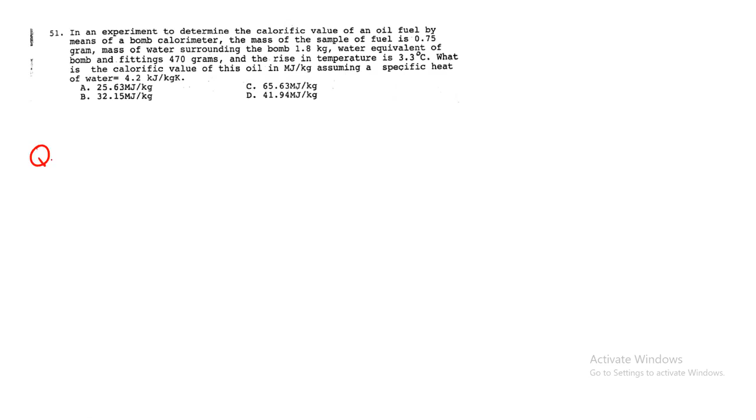So hinahanap, kung mapapansin nyo sa choices, megajoule per kilogram yung ating unit. So syempre, para makuha natin ang calorific value, so calorific value, or heating value, calorific value is also called heating value, is equals to Q over mass ng fuel.

So ilan ba yung Q natin? Si Q makukuha natin using MC delta T. So MC delta T, then divide natin yung mass ng fuel. Si mass dito guys, so si mass ng water surrounding the bomb 1.8 plus yung water equivalent of bomb and fitting. So ito is Q ng water to guys.

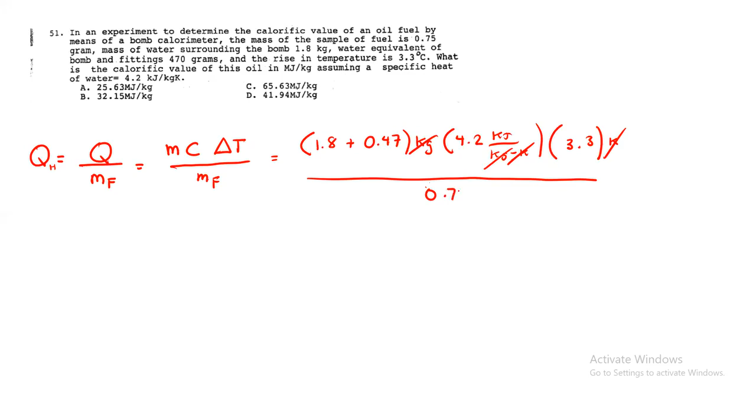So ilan yung mass natin? 1.8 kilograms plus 0.47 - itong 470 grams, 0.47 para maging kilogram. Then ang C natin is 4.2 kilojoule per kilogram to Kelvin. Then ang change in temperature, so 3.3 Kelvin. So cancel, kilogram divided by mass ng fuel na 0.75 grams. So 0.75, divide natin ng 1,000 para maging kilogram din. So yan, makuha natin yung sagot dito.

So 1.8 plus 0.47, ang makukuha natin dito guys is ilan ba? So 1.8 plus 0.47 times 4.2 times 3.3 divided by 0.75 over 1,000. So medyo malaki to: 41,949.6.

So megajoule or kilojoule per kilogram pa lang yan. So ito times natin ng 1 megajoule per 1,000 kilojoules. So syempre ang sagot is 41.9496 megajoule per kilogram. So therefore the answer is letter D.

So ganyan lang siya, no? Minsan guys, ang pagbabasehan mo lang is yung unit ng sagot. So alam natin pag calorific value, it pertains dun sa fuel natin. So ang unit ng ano is either kilojoules per kilogram or megajoules per kilogram. So per unit mass palagi ang calorific value. So yung heat, pwede mo makuha yan sa given, it's either MC delta T or may given na heat yan.

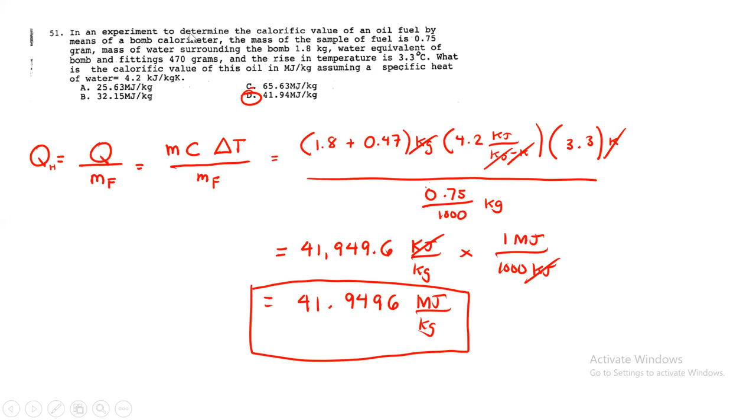So next, 53. So ito, pressure cooker problem. A pressure cooker operates by cooking food at a higher pressure and temperature than is possible at atmospheric conditions. Steam is contained in the sealed pot with vent hole in the middle of the cover, allowing steam to escape. The pressure is regulated by covering the vent hole with a small weight, which is displaced slightly by escaping steam. Atmospheric pressure is 100 kilopascal. The vent hole is 7 mm squared, and the pressure inside should be 250 kilopascal. What is the mass of the weight?

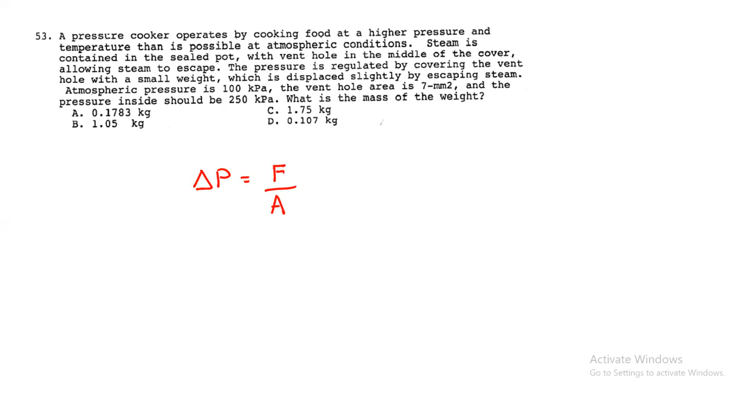So hanapin natin yung force. Yung force, pwede natin gamitin - so weight yan. Weight equals to mass times gravity. So ganun lang, change in pressure is equals to mass times gravity over area.

So ilan yung change in pressure natin? So 250, pag minus mo lang, lagi mo lang yung mas malaki muna minus yung sa mas maliit na pressure. So 250 minus 100 kilopascal. So kilopascal or kilonewton per meter squared is equals to mass times gravity na 9.81 meter per second squared divided by area na, so ilan yung area natin? 7 mm squared.

So 7 mm squared, 7 mm, divide mo ng 1,000 para maging meter. So squared, para maging meter. Kaya dinabay natin ng 1,000 yan para maging - or ano pala siya, no? 7 mm squared siya mismo.

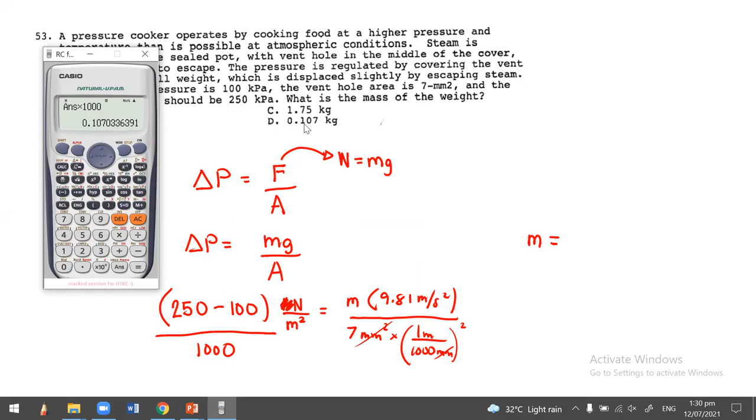So the answer is letter D. Very easy.

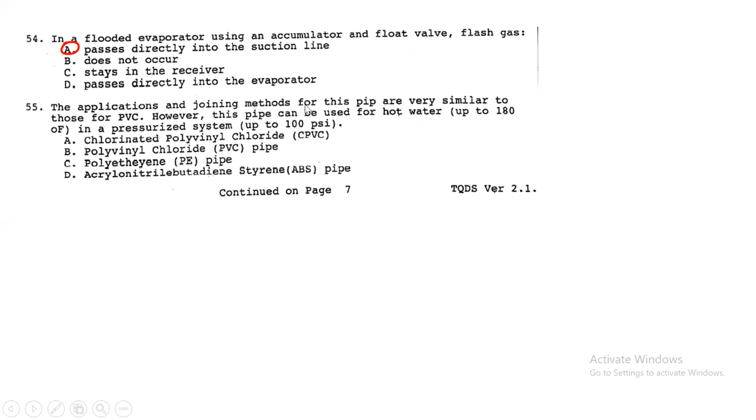Then 55: The application and joining methods for this pipe are very similar to those for PVC. However, this pipe can be used for hot water up to 180 degrees Fahrenheit in a pressurized system up to 100 PSI. So the answer to 55 is chlorinated polyvinyl chloride. That's also in the blue book.

Next, 56: In a hydraulic turbine which has a diameter of 60 inches, speed of 350 RPM, coefficient of velocity of 0.98, peripheral speed factor of 0.45, generator efficiency of 90%, and jet diameter from nozzle of 6 inches, determine the power input in HP.

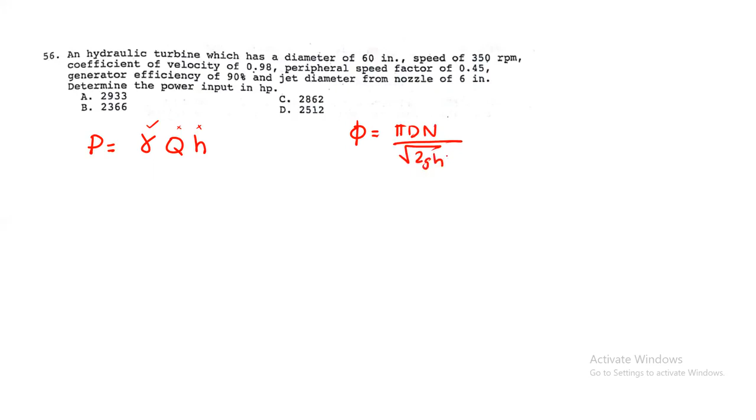Peripheral coefficient is equal to pi dn over square root of 2gh. So we can get it using this formula. Peripheral coefficient or peripheral speed factor 0.45 is equal to pi times diameter. So how much is our diameter here? 60 inches, divide by 12 to make it feet.

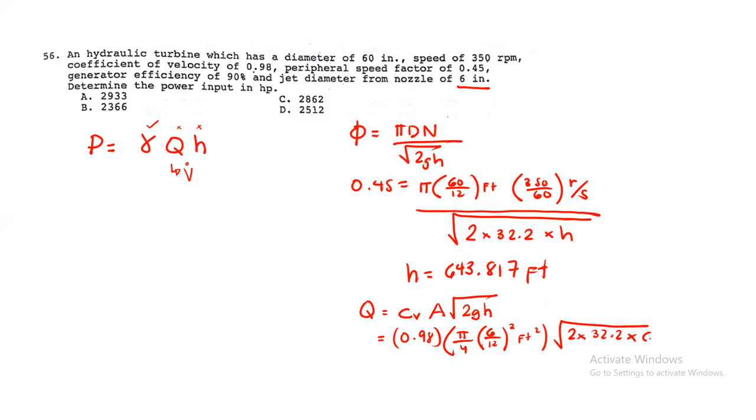Or actually, it's not 60 we'll use there, but the diameter of the nozzle or jet diameter from nozzle: 6 over 12 squared, feet squared, times square root of 2 times 32.2 times the height 643.817 feet. So that gives us feet per second.

Square root of 2 times 32.2 times 643, times pi over 4 times 6 over 12, squared—this is the one that's squared—times 0.98. So 39.18 cubic feet per second.

Let's substitute here. Specific weight is 62.4 pounds per cubic foot, then the volume flow rate is 39.18 cubic foot per second, times head of 643.817 feet. So that cancels, pounds to foot per second. Let's convert, divide by 550 pounds to foot per second per HP. So all this cancels out.

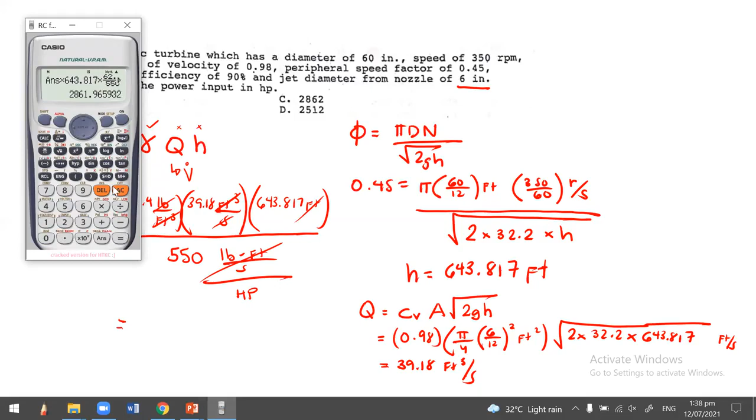So only HP is left here. So what's the answer? Times 643.817 times 62.4 divide by 550. So 2862 HP. That's how it's done, guys. The answer is letter C.

The next, problem number 57. Pure water enters a 3 centimeter diameter copper tube with a given velocity, 50, temperature 20 degrees Celsius, and is heated. What is the average convective coefficient?

So H is what we're looking for here. For water, kinematic viscosity is given as 1.006 times 10 raised to negative 6, Prandtl number is 7, and thermal conductivity of 0.597 watts per meter to Kelvin.

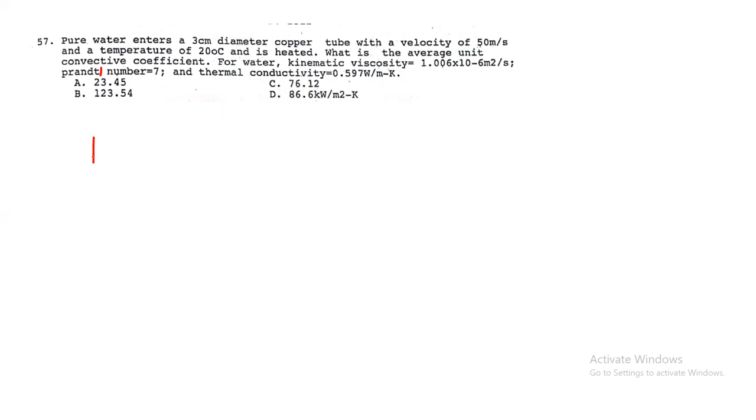So how do we solve this, guys? Our formula here is H equals NU times K divided by diameter. NU is the Nusselt number. For pure water, the Nusselt number is 4.36 constant.

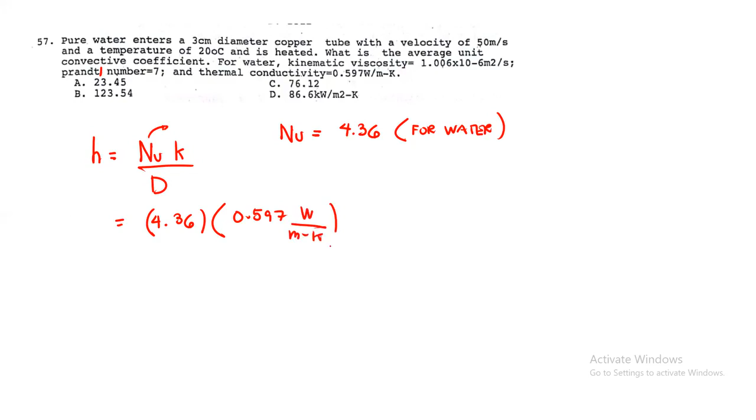K is 0.597 watt per meter to Kelvin. Our diameter is 3 centimeters, so we divide by 100 to convert to meters. The meter doesn't cancel, it becomes meter squared. So our answer here, guys, is 86.76 watt per meter squared to Kelvin. The answer is letter D.

Not all the given values here will be used. You just pick the ones usable in the actual formula. So for this problem, memorize that the convective heat transfer coefficient H equals Nusselt number times thermal conductivity divided by diameter. The Nusselt number of pure water at 20 degrees Celsius is 4.36, constant and unitless.

Next, problem 58. The journals of a stainless steel shaft are 38 centimeter diameter. It runs at 105 RPM and the coefficient of friction between journals and bearings is 0.02. If the average load on the bearings is 200 kN, find the heat generated per minute at the bearings. This is actually a machine design problem, but it appears here in PPE topics. Sometimes questions migrate from math to PPE or machine design to PPE or vice versa, so we need mastery of all subjects.

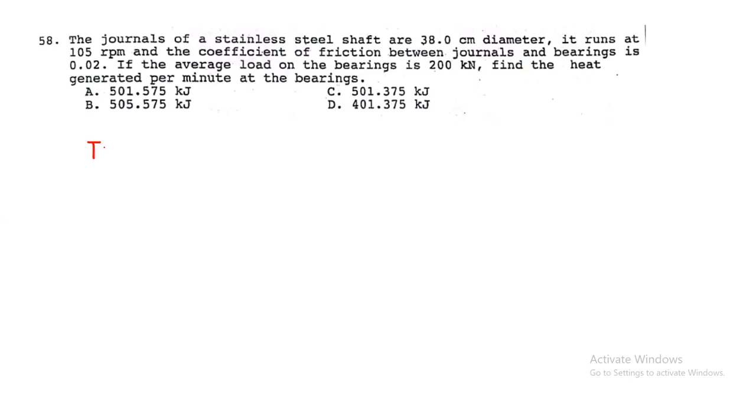First, our torque equals force times radius times coefficient of friction - this is the frictional torque. If there's no given friction, it's just force times radius. Our force is 200 kilonewton or 200,000 newton times radius.

Let's convert 38 centimeters into mm, giving 380 mm. Divide by 2 to get the radius, times friction 0.02. That's our frictional torque. Calculate: 200,000 times 380 divided by 2 multiplied by 0.02 equals 760,000 Newton-mm.

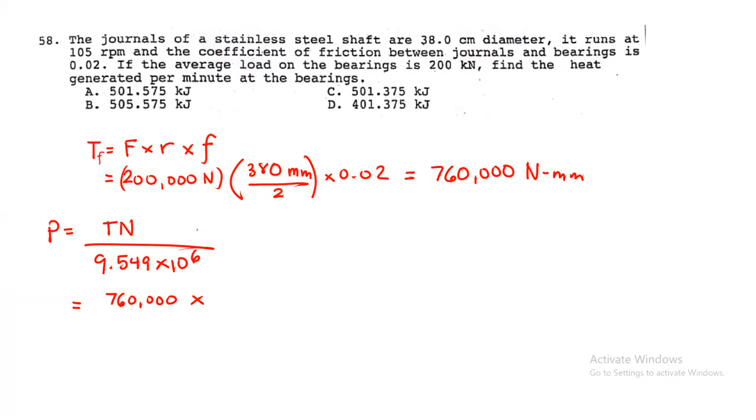Now let's get the power. Power equals Torque times N over the factor 9.549 times 10 raised to 6, which gives us power in kilowatts. Torque is 760,000, times RPM which is 105, divided by 9.549 times 10 raised to 6. So what is our power?

Times 105 divided by 9.549 times 10 raised to 6, giving us 8.357. This unit is kilowatts or kilojoule per second, so we multiply by 60 seconds per minute to cancel units properly.

So the answer is 501.41 kilojoules per minute. That's our answer. What's the closest choice? 501 point... this is closest, 575, so 501.575.

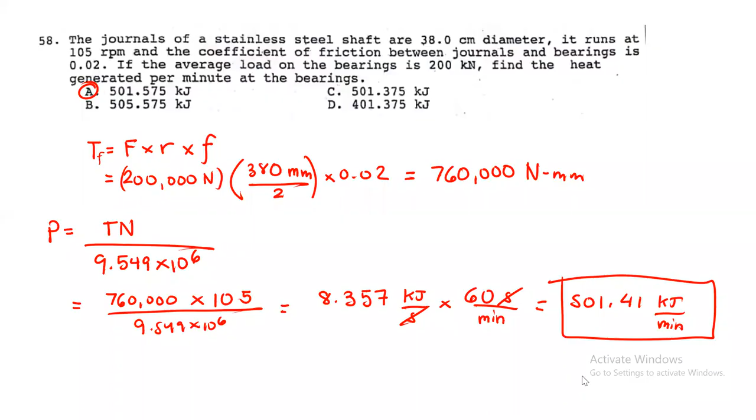Next, problem number 59. An insulated steam pipe located where the ambient temperature is 32 has an inside diameter of 5 cm with 1 cm thick wall. The outside diameter of the corrugated asbestos insulation is 12.5 cm and the surface coefficient of still air is 12. Inside the pipe is steam having a temperature of 170 with film coefficient H inside equal to 6,000. Thermal conductivity of pipe and asbestos given as 45 and 0.12.

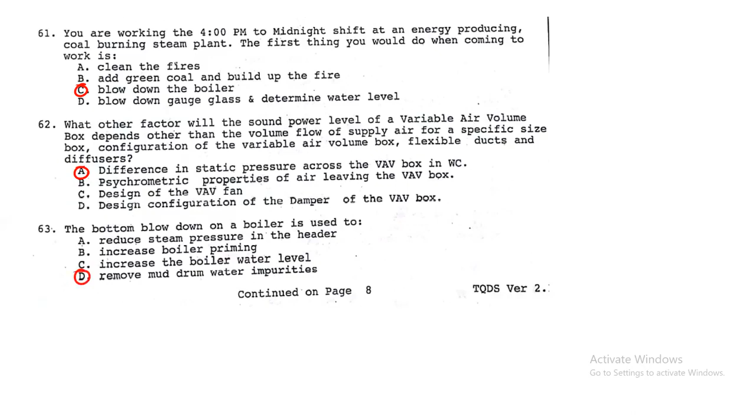So, ang sagot dito is blow down the boiler, letter C. Naulit lang yan. Then 62, naulit rin. So, ang sagot diyan is letter A. Then 63, the bottom blow down on a boiler is used to, ang sagot dito, letter D. Remove mud drum water impurities. So, next.

So, 64, the moisture content of the steam at exit will be blank by also increasing the boiler pressure in Rankine cycle. So, ito is galing sa Blue Book problems rin, no? So, the answer here is letter A. It will increase the boiler pressure.

So, next, 65. Pure steam at a pressure of 30 bar and a temperature of 375 degrees Celsius is generated in a boiler at a rate of 30,000 kilograms per hour from feed water at a temperature of 130 degrees Celsius. Yung fuel natin has a calorific value of 42 megajoules per kilogram and the daily consumption is 53 tonne. What will be the equivalent engine power if the overall efficiency of the plant is 0.13? So, itong 53 tonne na to, ito is metric ton. Pag may nabasa kayong ganyang spelling ng ton, metric ton yan.

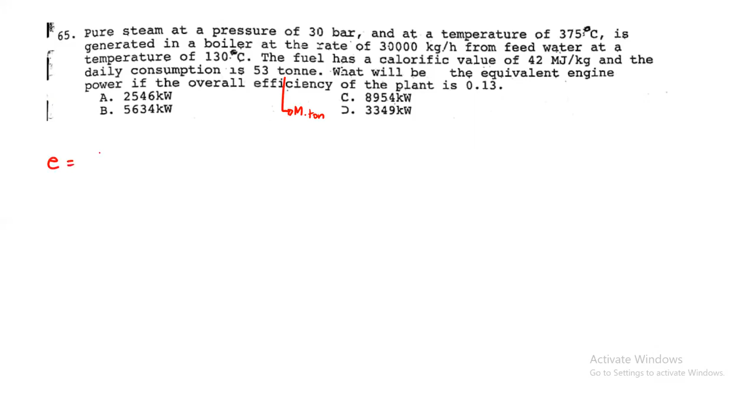So, para makuha natin yung equivalent engine power, makuha natin yan using efficiency is equals to equivalent engine power over yung heat ng fuel, so mf QH. Alam natin ang efficiency is power output over power input. Yung power input, laging yan yung power ng fuel. So, ilan yung efficiency? 0.13 is equals to PE divided by mass ng fuel, 53 metric tons. Daily consumption, ibig sabihin per day yan. So, 53 metric tons per day.

Then yung heating value ng fuel or yung tatawagin natin calorific value, 42 megajoules per kilogram. So i-convert lang natin to. Times 1 day per 24 hours times 1 hour per 3,600 seconds. Then 1,000 kilograms per metric ton. So, ano na matitira dito? Makakancel si kilogram. Megajoule per second. So, i-convert pa natin yan, 1,000 kilojoules per megajoule. So, makukuha natin si engine power, or yung power output.

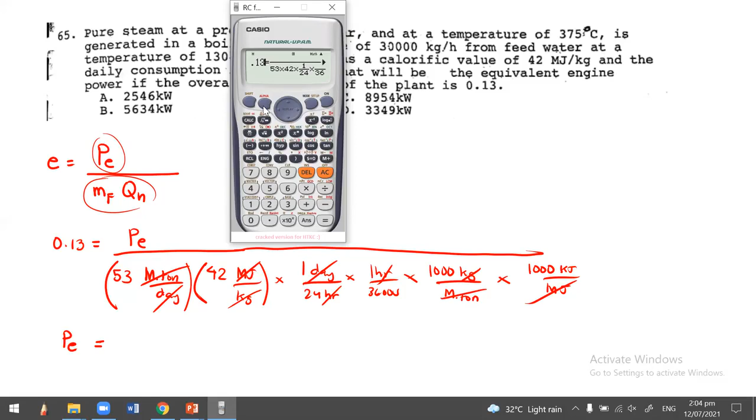So, 0.13. So, ilan to? Shift solve pala natin. So, 3349 kilowatts. So, tandaan nyo sa problem na to, power output over power input.

So, next, 66. Si Neil Armstrong, an astronaut, is subjected to an acceleration equal to 5 times the pull of the Earth's standard gravity during the takeoff in a spaceship. The said astronaut is 180 pounds and the takeoff is vertical. Determine the force he exerts on the seat.

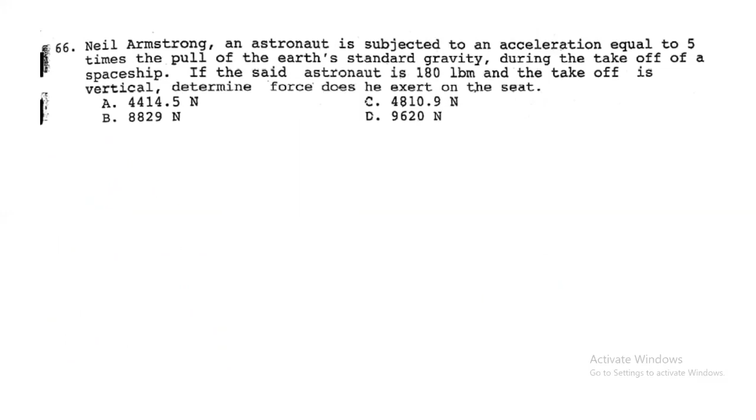So, paano to? Ganun lang din yan, no? Summation ng force vertical is equals to 0. Yung motion niya kasi is pataas, so yan yung force niya. Then, meron siyang weight, syempre. Then, yung reverse effective force, laging ina-apply yan opposite dun sa direction ng motion niya. So, pababa rin yung reverse effective force. So, summation ng force vertical: F is equals to weight plus reverse effective force. Ang weight natin is mass times gravity plus reverse effective force is mass times acceleration.

So, naulit pala itong problem na to, no? So, mass times acceleration plus gravity. Ang acceleration natin is 5 times gravity, sabi niya sa problem. So, m times 5g plus g. So, mass is 180 pounds times 5 times 32.2, or Newton pala kasi dapat yung lalabas. So, i-divide natin ito ng 2.2 para maging kilogram, guys. So, 5 times 9.81 plus 9.81 meter per second squared. Ang lalabas dito is in Newton. So, ang sagot, 4810.9 Newton. The answer is letter C.

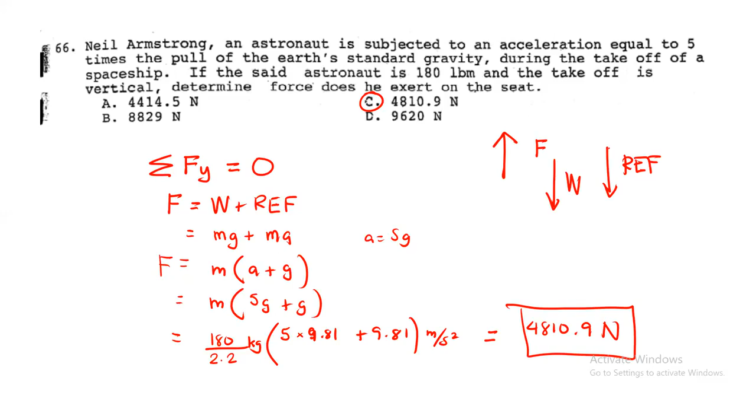So, next, 67. The term spalling refers to a boiler, combustion chamber yan. Next, 68. A newly installed turbine receives 150 pounds mass per second of air at a pressure of 63 psia and a temperature of 2450 degrees Rankine and expands it polytropically to a pressure of 14.7 psia. The exponent n is equal to 1.45 for the process. Determine the power. So paano tong number 68?

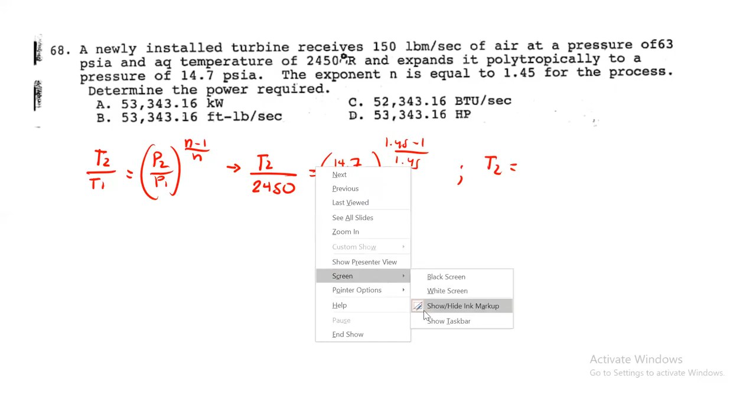Sa 68, easy lang tong solution dito, no? Para makuha natin si power, polytropic process kasi to. So kunin muna natin guys dito si T2. T2 over T1 is equals to P2 over P1 raised to n minus 1 over n. So ang T1 natin, 2450 degrees Rankine, P2 is 14.7, P1 natin is 63 psia. Ang n natin is 1.45. So, makukuha natin T2: raised to 0.45 over 1.45 multiplied by 2450. So, ilang sagot dito?

.45. Bakit? Taas ko pala na yan. So, 1559.62. So, 1559.62 degree Rankine. So, syempre, para makuha natin yung power required, is equal to power or yung work. Syempre, ang polytropic work is M, or mass flow rate times R times T2 minus T1. So, pwedeng ganitong formula ang gamitin natin, no? Divided by 1 minus n.

So, ilan yung mass flow rate natin? 150 pounds per second times R natin is 53.34 pounds force-foot per pound mass-degree Rankine. Then times T2. So, ang T2 natin is 1559.62 minus 2450 degree Rankine, divided by 1 minus 1.45. So, makancel dito degree Rankine, pounds of mass. So, matitira dito is foot-pounds per second. So, i-convert pa natin into,

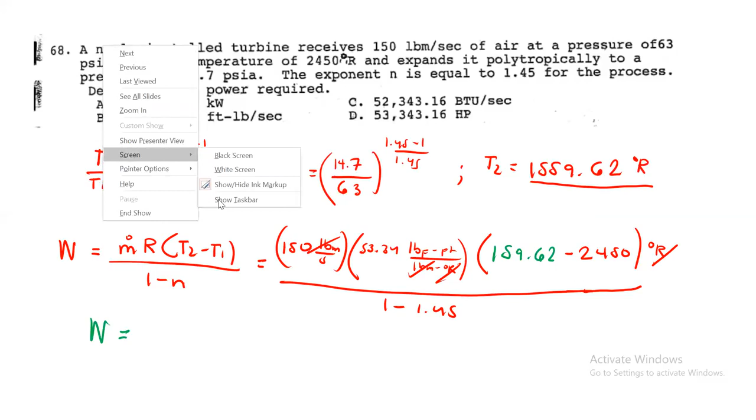So, work is equals to, so try natin, times 159.62 minus 2450 divided by 1 minus 1.45. So, ang makuha natin dito is 40,722,956 foot-pounds per second.

Then convert natin, 1 BTU per 778 foot-pounds. So, makancel. Divide natin 778. So, 52,343.13 BTU per second. So, sakto lang din nakuha.

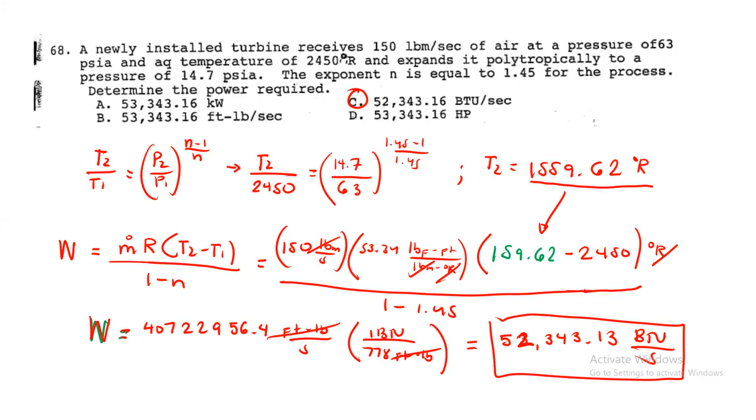69. What is the pressure at 12,300 feet altitude if air is incompressible, if the atmospheric air is 14.7 psia and 60 degree Fahrenheit at sea level? Note at 60 degree Fahrenheit the density of air is 0.0763 and P1 is 14.7. So sabi niya the air is incompressible. So P2 is equals to P1 e raised to negative gh over RT. So, yan yung gagamitin nating formula.

So, P1 natin is 14.7 psia times e raised to negative g. So, dito, kapag English unit, tatanggalin mo na yung g. So, sulat mo na dyan 12,300 feet divided by 53.34 times temperature na 60 plus 460. So tatandaan niyo pag English, tatanggalin niyo na yung g dyan.

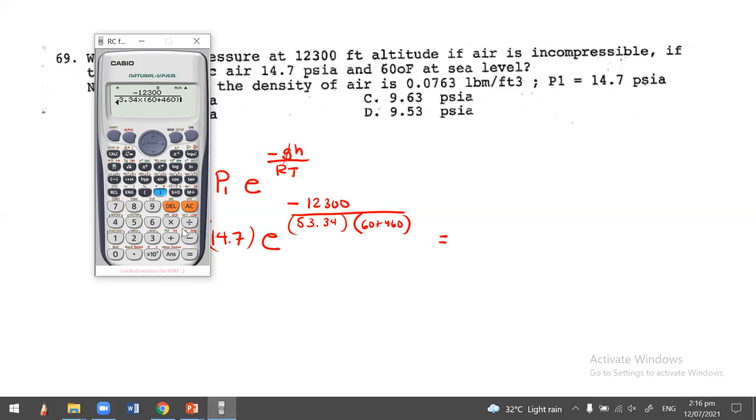So ilan yung lalabas? 14.7 e raised to negative 12,300 over 53.34 times 60 plus 460. So 9.43 psia. So the answer is letter B.

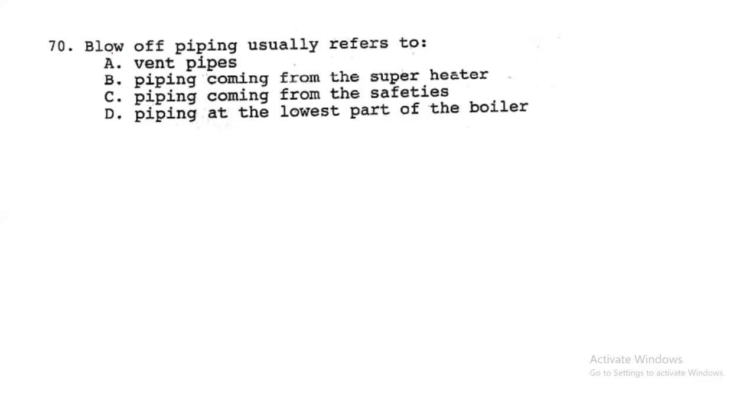So next, tuloy-tuloy lang tayo. Problem number 70. Blow-off piping usually refers to, so ang sagot dito, piping at the lowest part of the boiler, letter D. So next, 71. Medyo mahaba to. Heat transfer na naman. Hinahanap dito, what thickness of insulating bricks is necessary between refractory and steel?

So ang gagamitin natin formula, Q is equals to change in temperature over x1 over k1 plus x2 over k2 plus x3 over k3. So ang Q natin dito is 788 watts per meter squared. Then change in temperature natin, 1,200 minus 40, divided by x1. Yung thickness number 1 is 15.2 cm, or 0.152 meter.

Divide natin ng 1.384 na k1, plus x2. Yan yung hinahanap natin, yung thickness between refractory and steel, divided by k2, yung insulating brick, 0.15, plus x3. Meron pang 1 cm na steel, so 0.01 meter divided by k3. Ang k ng steel is 45. So makuha natin x2 in meter.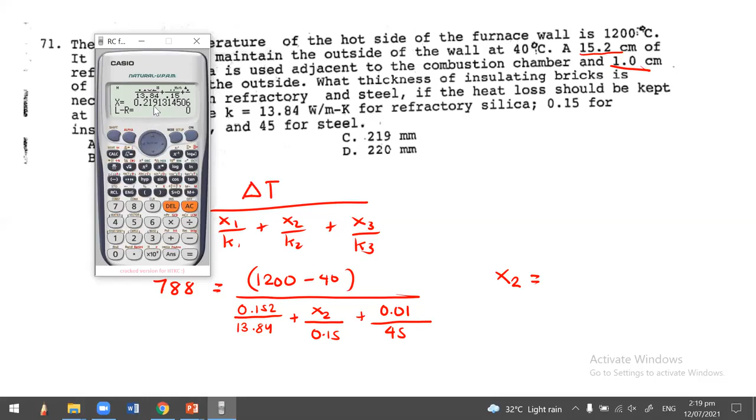(1200 minus 40) divided by 0.152 over 13.84 plus alpha x 0.01 over 45. So shift solve. So 0.219. So 0.219 meter or 219 mm. So the answer is letter C.

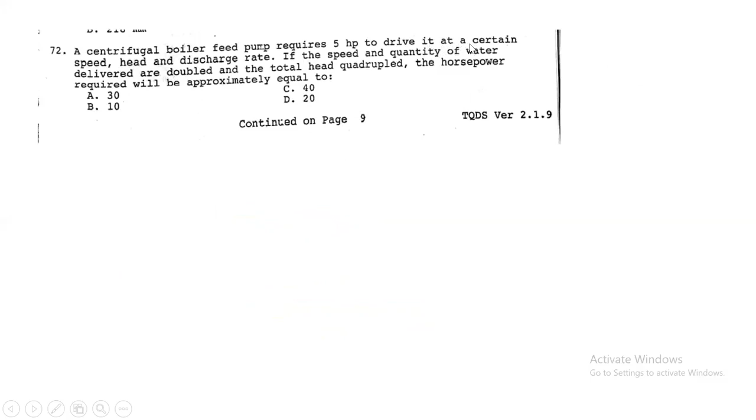So next, 72. A centrifugal boiler feed pump requires 5 HP to drive it at a certain speed, head, and discharge rate. If the speed and quantity of water delivered are doubled and the total head quadrupled, the horsepower required will be approximately equal to.

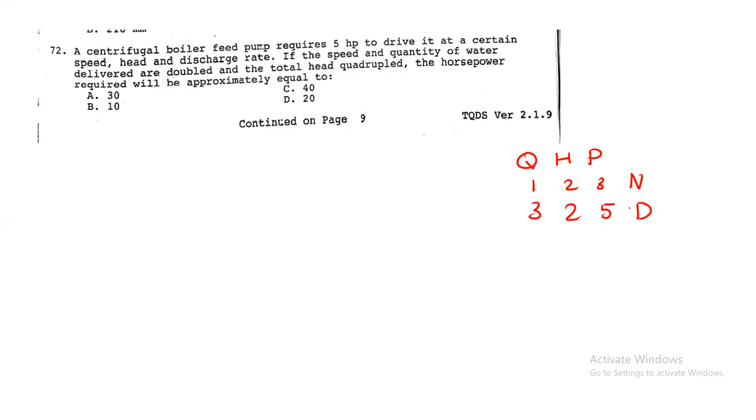So P2 divided by P1 is equal to N2 over N1, raised to 3, then D2 over D1 raised to 5.

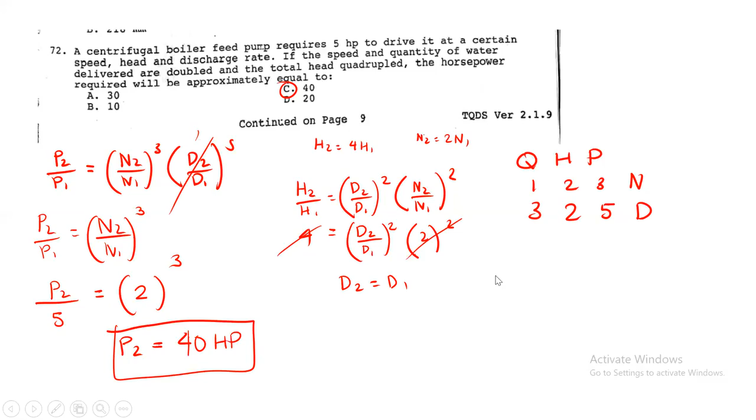So next, 73. As a safety precaution, refrigerant cylinders should be stored and transported in the blank position to keep the pressure relief valve in contact with the vapor space, not the liquid inside the cylinder. So the answer to 73 is upright, always upright. Then 74, during hydrostatic test, the safety valve should be, of course, removed.

The next, 75. So itong college student. So hinahanap dito guys, determine the temperature in the room when she comes back 10 hours later.

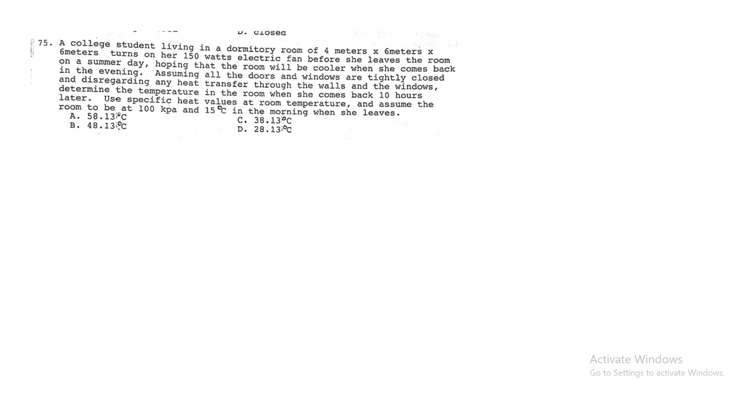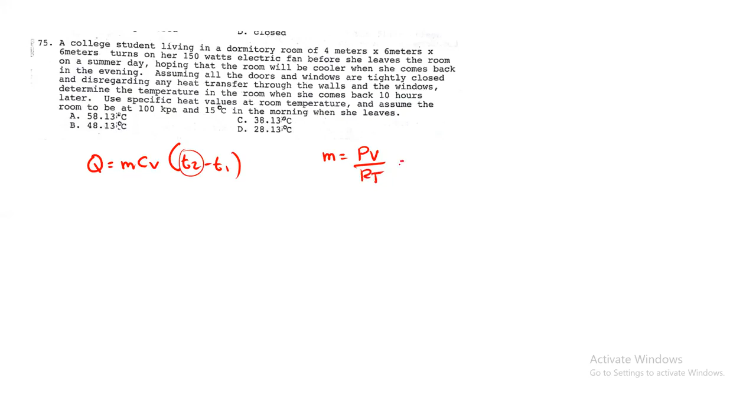So makuha natin using Q is equal to mCv delta T, so T2 minus T1. Hinahanap natin dito si T2. So kunin muna natin si mass guys, using PV over RT. The pressure given is 100 kilopascal. Then the volume is 4 times 6 times 6, the dimension of the room, divided by R, 0.287, times temperature, 15 plus 273. So makuha natin dyan is 174.216 kilograms.

Substitute natin dito. So may given tayong Q or yung power. The power is 150 watts. So Q can be obtained using power times time. So 150 watts or 0.15 kilojoules per second or kilowatts times time. So 10 hours, times 3,600 seconds per hour, then times 10 hours. Ma-cancel, para maging kilojoules na lang yung Q natin. Then is equal to mass.

174.216 kilogram times Cv. So, ano yung Cv ng air? The Cv of air is 0.7186. Since sinabi niya rin na assuming all doors and windows are tightly closed, ibig sabihin insulated yung room natin, constant volume. 0.7186 kilojoule per kilogram Kelvin.

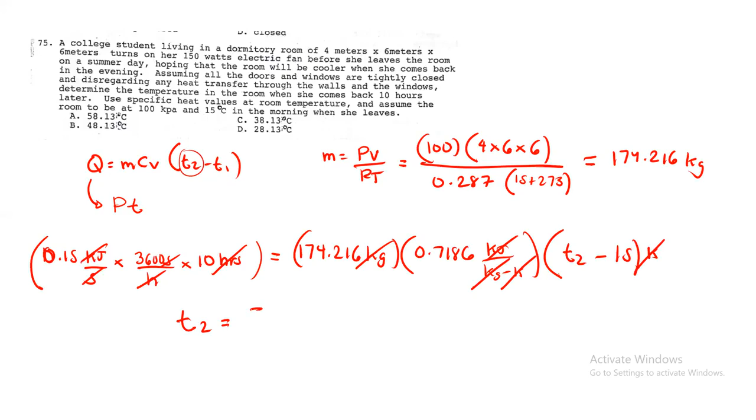Then, times T2 minus T1, 15 degrees Celsius. Pwede natin Kelvin na lang yan dahil change in temperature. So, maka-cancel Kelvin, kilogram, kilojoules. So, T2 is 58.13 degrees Celsius. So, the answer is letter A.

So, next, problem number 76. The enthalpy of a groundwater in a 20 megawatt geothermal power plant is 1,000 kilojoules per kilogram. If the quality after throttling is given as 28% and the overall plant efficiency is 20%, what is the mass flow rate of the steam entering the turbine?

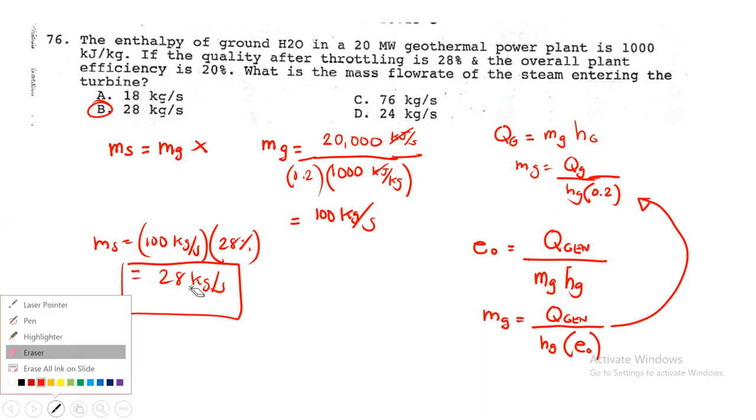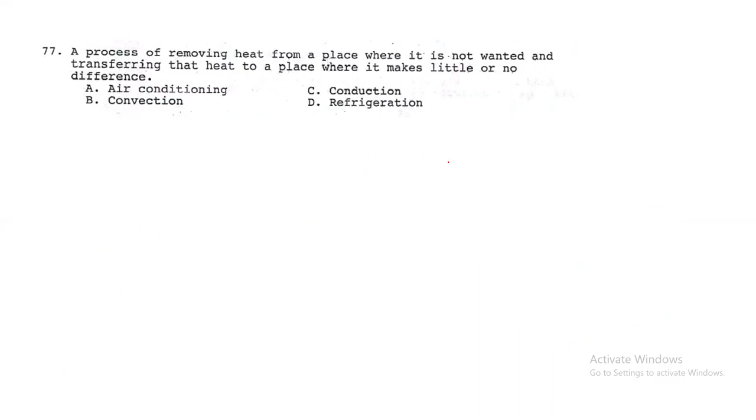So next, problem number 77. A process of removing heat from a place where it is not wanted and transferring that heat to a place where it makes little or no difference. So ang sagot dyan is letter D, refrigeration. So next, 78.

The mass analysis of a fuel is 84% carbon, 14% hydrogen, 2% ash. It is burned with 20% excess air relative to stoichiometric requirement. If 100 kilograms per hour of this fuel is burned in a boiler, what is the volumetric flow rate of the gas if its temperature and pressure are 250 degrees Celsius and 1 bar respectively? Note, air contains 23.1% oxygen by mass. The universal gas constant is 8.3143. And atomic mass relationships are oxygen 16, carbon 12, and hydrogen 1.

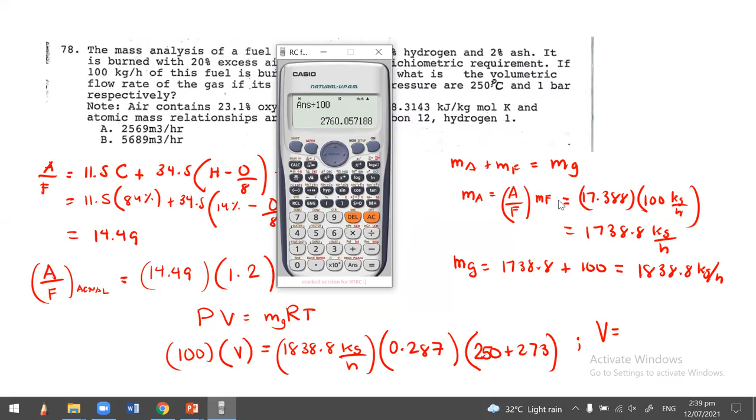1838.8 times 0.287 times 250 plus 273, divided by 100. So the answer is 2760 meter cube per hour. So the answer is letter C. Ganun lang siya guys.

Next, problem 79. The mass flow rate of Freon 12 through a heat exchanger is 10 pounds per minute. Enthalpy of Freon entry is 102 and of Freon exit is 26. Water coolant is allowed to rise 10 degree Fahrenheit. So the water flow rate in liters per minute is what we need to find. We're looking for the volume flow rate in liters per minute of the cooling water.

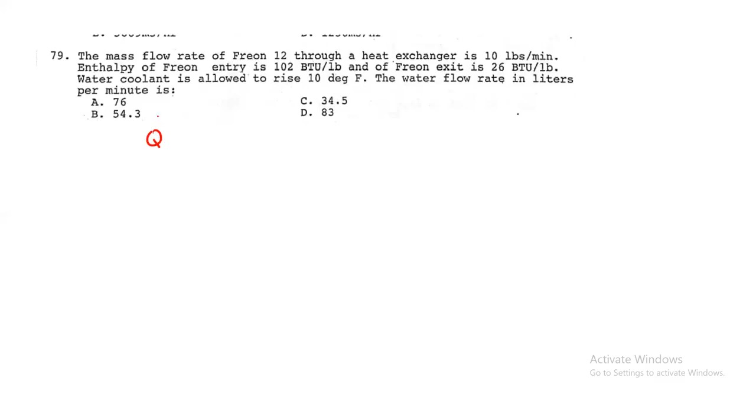So in a heat exchanger, the Q of the Freon is equals to Q of the water. What is Q of Freon? Mass of Freon times H1 minus H2 is equals to mass of cooling water times Cp times delta T. So how much is the mass of Freon? 10 pounds per minute. Then H1 minus H2 is 102 minus 26, in BTU per pound, equals mass of cooling water. So how much is the mass of cooling water here? That's what we're looking for. The mass of cooling water, we can get using density times volume flow rate.

So let's substitute, density times volume flow rate. How much is our density? Density is 62.4 pounds per cubic foot, times volume flow rate, times Cp of water which is 1 BTU per pound per degree Fahrenheit or Rankine, times change in temperature given as 10 degree Fahrenheit. So the pounds will cancel, then BTU will cancel, and what remains is cubic foot per minute.

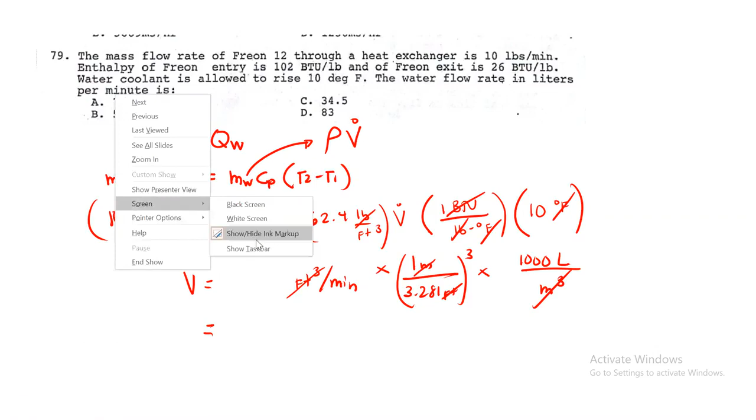Let's calculate: 10 times 102 minus 26 is equal to 62.4 times alpha x times 10. Shift solve. So 1.2179, times 1 over 3.281 raised to 3, times 1,000. So the answer is 34.48 liters per minute. The answer is letter C.

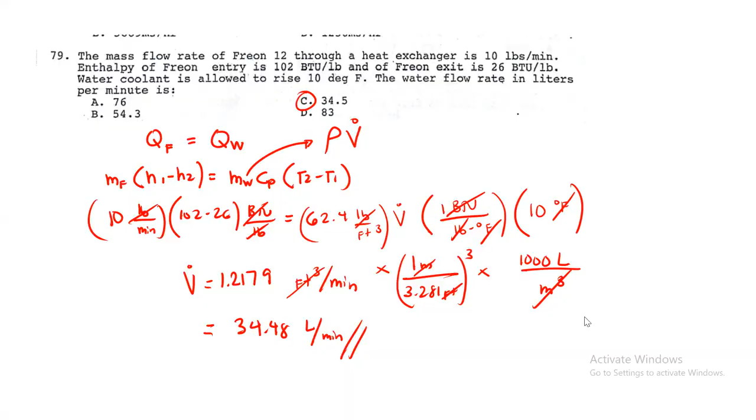Next problem, problem number 80. Hot gases at a temperature of 280 flow on one side of a metal plate 1 cm thick, and air at 35 flows on the other side. The heat transfer coefficient of the gases is 31.5 and that of the air is 48. Calculate the overall heat transfer coefficient. We're looking for U here.

So U is equals to 1 over RT. What is RT? That's the reciprocal of the overall heat transfer coefficient. We can get RT using 1 over H1 plus X over K plus 1 over H2. We don't have a given K for the metal plate, so for the metal plate we use K is equals to 50.

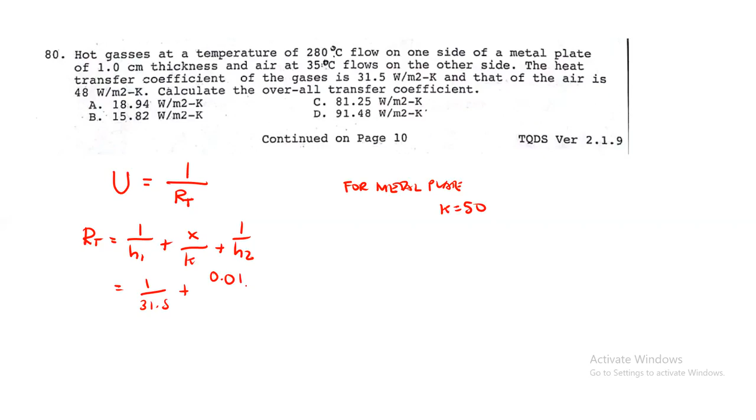So it is equal to 1 over H1 which is 31.5, plus X which is 0.01 (1 cm becomes 0.01 meter), divided by 50 watt per meter per Kelvin, plus 1 over H2, where H2 is 48. So how much is that?

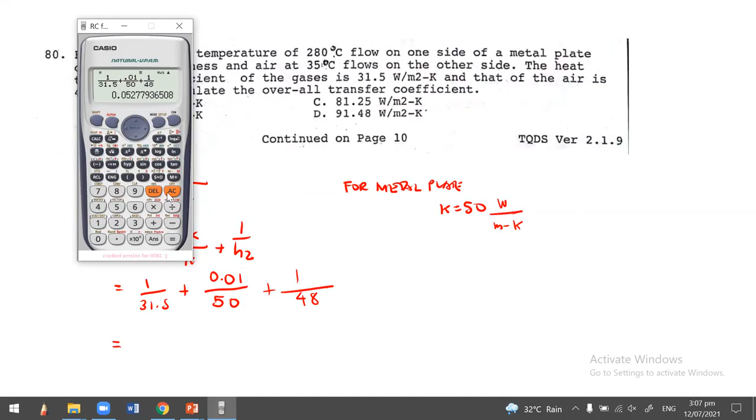One over 31.5 plus 0.01 over 50 plus 1 over 48 equals 0.0528. So we get U is equals to 1 over 0.0528, which is equal to 18.94 watt per meter squared per Kelvin. That's the answer, guys.

So we should memorize this 50 watts per meter per Kelvin as the K of the metal plate.

Next, problem 81: Tubing used for air conditioning installations is usually insulated at, the answer is letter C, at low pressure side. Then 82, this is also from our blue book. The answer there is 2.2 meters. Then 83, the refrigerant used in steam jet cooling is, of course, water.

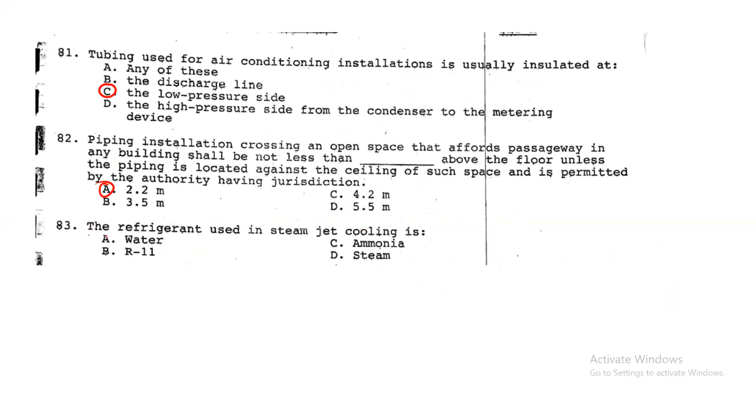Then 84, we're looking for the air fuel ratio on molar basis of octane gas. What is octane? Octane, guys, is C8. In naming hydrocarbons, it's CN, H, then the suffix ANE, so 2N plus 2. So for octane, N is 8, C8, H, then 2 times 8 is 16, plus 2 is 18. So it's C8H18.

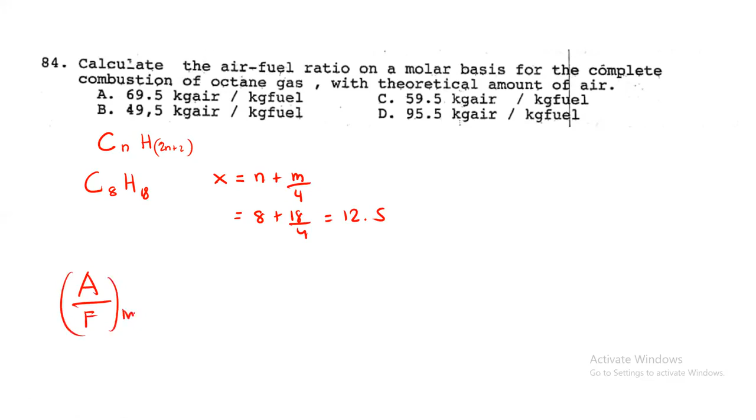So paano ba yung molar basis na air fuel ratio? First kunin muna natin si X. Si X is N plus M over 4. Ang N natin dyan is 8, ang M natin is 18. 18 divided by 4 is 12.5. So para makuha natin ang molar air fuel ratio, molar is equals to 4.76x, yan ang formula sa combustion. So 4.76 times 12.5 is equal to 59.5 kilogram of air per kilogram of fuel. Ang answer is letter C.

Next, number 85. The discharge line shall be vented to the atmosphere through a diffuser.

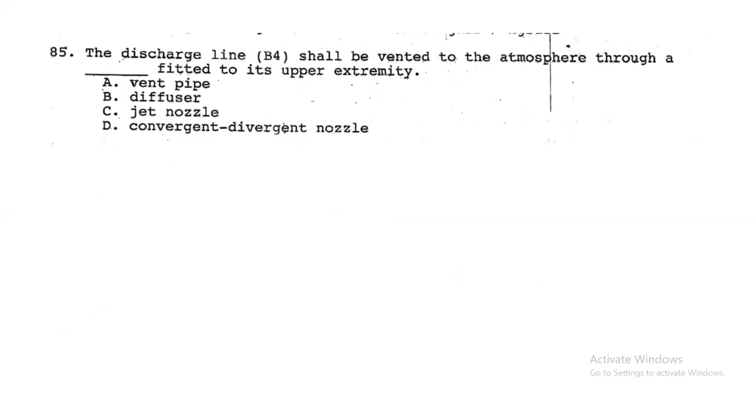Next, 86. A stainless steel cylindrical tank with 1 feet diameter, 4 feet high, contains 3 feet of water. What rotational speed is required to spin water to the top? Laging lumalabas ito sa board exam, pwede na rin natin itong i-look-spam kung sakali. May formula tayo dyan para makuha ang rotational speed to spin water to the top: height is equals to V squared over 2G.

Syempre kailangan natin kunin si V, V is equals to RW. Para makuha itong rotational speed. Ano yung H natin dito? Si H, guys, makukuha natin: 4 feet high minus 3 feet of water. Ang H over 2 kasi is equals to 4 minus 3. So makukuha natin H is equals to 4 minus 3 is 1, times 2 is 2. So 2 feet.

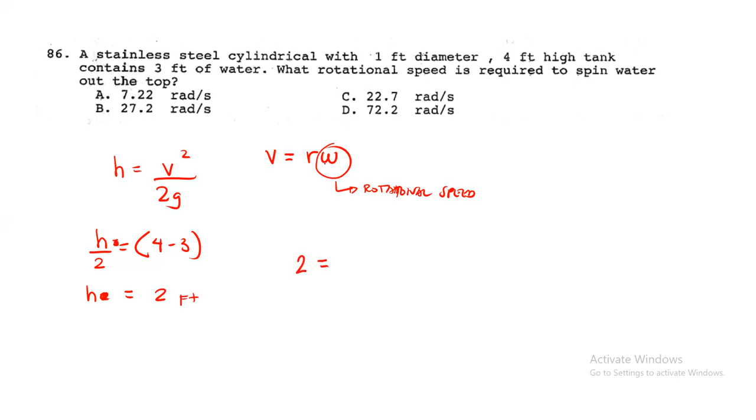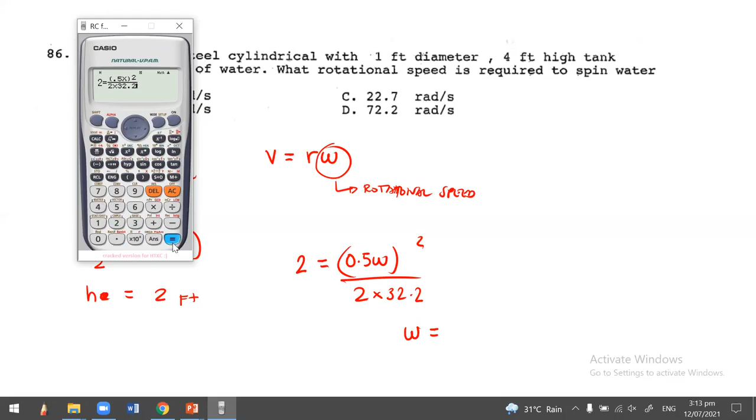Substitute natin dito: 2 is equals to V squared, ang V squared is RW squared, divided by 2G. Ang G natin is 32.2. Palitan natin itong radius, ilan yung radius natin dyan? 0.5, dahil 1 feet diameter o 0.5 feet radius. 2 equals 0.5 omega squared divided by 2 times 32.2. Makuha natin W dito ay rad per second: 22.7 rads per second.

Itong problem na ito, paulit-ulit itong lumalabas sa board exam, pwede natin siyang i-look-spam. 22.7 na kagad pag nakita nyo ulit yung tanong na yan.

Next, 87. Freon is... ang sagot ay non-toxic.

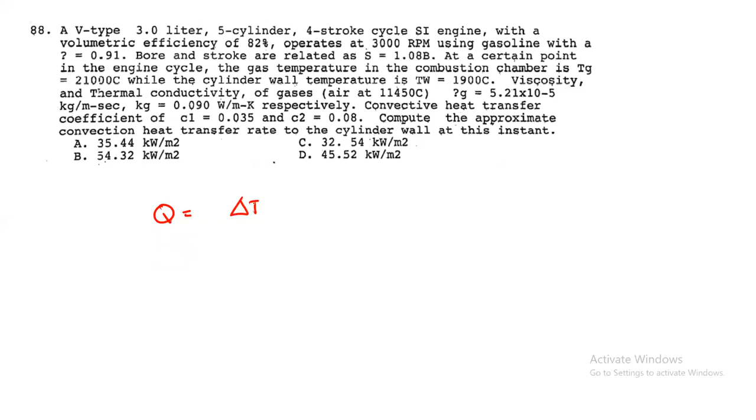Next, 88. Medyo mahaba itong problem. Ang hinahanap dito: compute the approximate convection heat transfer rate to the cylinder wall at this instant. Hinahanap natin ang heat transfer rate. Q is equals to change ng temperature divided by 1 over H1 plus X over K plus 1 over H2. Ganyan lang kasimple, guys.

Wala siyang binigay na thickness, kaya si thickness dito automatic, mag-a-assume tayo: X is equal to 8 cm. Change in temperature natin: 2100 minus 190, degrees yan dapat. So 2100 minus 190 divided by 1 over H1, 0.035, plus X, ang X natin na thickness is 0.08 meters.

Divided by K, ano yung K natin? 0.090 plus 1 over H2. Ang H2 natin is 0.08. Ito si H1 at saka H2. Ilan makukuha natin dito? Minus 190 divided by 1 over 0.035 plus 0.08 over 0.09 plus 1 over 0.08. So, 45.52 kilowatts per meter squared.

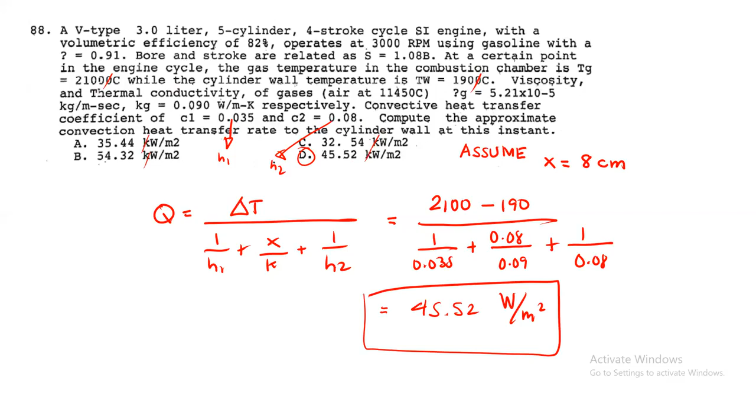Next tayo, problem number 89. Consists of refrigerant mixtures - basta mixtures ng refrigerant yan, automatic blends. So 89 is blends.

Next, 90. An economizer is used with the steam boiler in order to raise the temperature of the boiler feed water by utilizing some of the heat in the exit flue gases. So the answer is letter D.

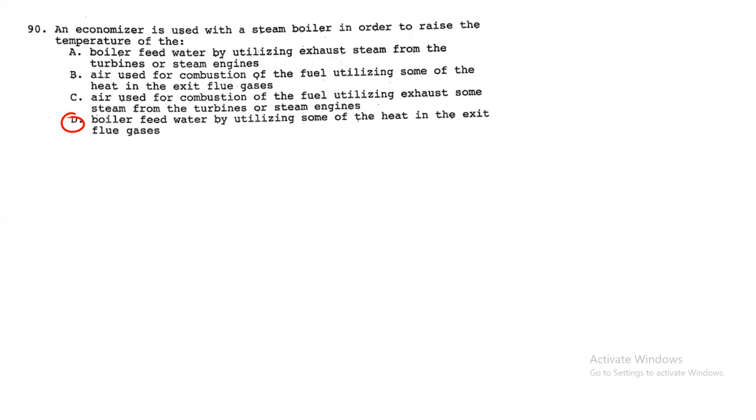Ang sagot sa 92 ay isothermal.

Then 93, as a rule of thumb, for a specified amount of compressed air, the power consumption of the compressor decreases by blank for each 3 degrees Celsius drop in the temperature of inlet air to the compressor. Ang sagot dito, syempre, 1%.

Number 94. A nozzle receives 0.5 kilogram per second of air at a pressure of 2700 kilopascal and a velocity of 30 meter per second, with an enthalpy of 923 kilojoules per kilogram. The air leaves at a pressure of 700 kilopascal with an enthalpy of 660. Determine the exit velocity from the nozzle.

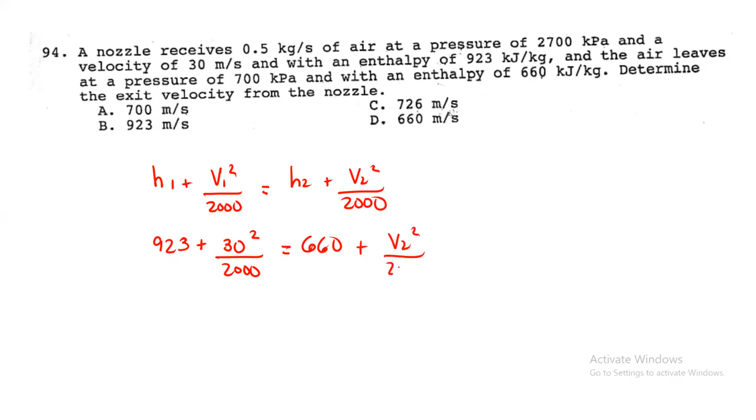So we are looking for the exit velocity, V2. We can use H1 plus V1 squared over 2000 equals H2 plus V2 squared over 2000. Direct substitution: H1 is 923 plus 30 squared over 2000 equals H2, 660, plus V2 squared divided by 2000. So we can solve for V2 by shifting and substituting. The answer comes out to 726 meter per second, so the answer is letter C.

Number 95. Which of the following is not the cause of black smoke in a diesel engine? Of course, the answer is letter C, high compression pressure. That does not cause black smoke.

Next, problem number 96, the chicken problem. So what we're looking for here is the amount of heat that needs to be removed, which is basically our refrigerating effect.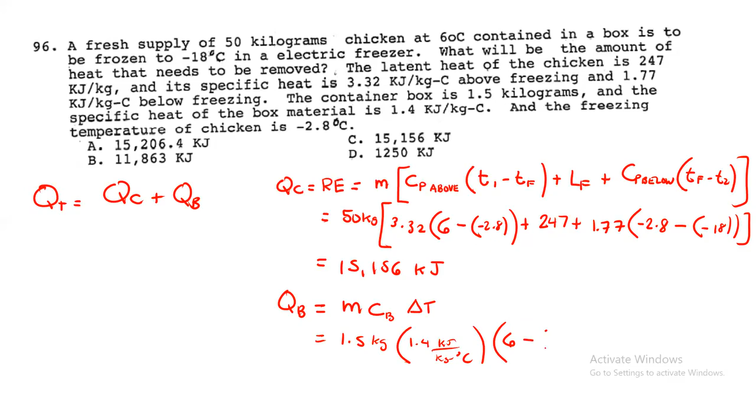To get Q of box, we use MC delta T: mass of box times CP of box times change in temperature. The mass of the box is 1.5 kilograms, times specific heat of box, 1.4 kilojoules per kilogram-degree Celsius, times the change in temperature from 6 degrees Celsius to negative 18 degrees Celsius, so minus negative 18. That gives us 50.4 kilojoules.

Substituting: Q of chicken, 15,156, plus 50.4, equals 15,206.4 kilojoules. So the answer is letter A.

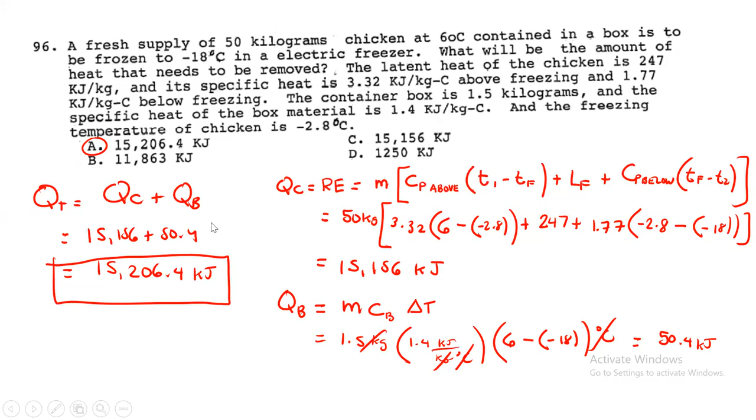Next, number 97: in which direction does heat flow? Of course, we know the answer is letter B, from warm substance to cold substance.

Number 98: if the specific gravity of mercury is given as 13.55, what is the specific weight of mercury? The specific weight of mercury equals specific gravity times specific weight of water. Specific gravity is 13.55, and the specific weight of water is 9.81 kilonewton per meter cube. So 13.55 times 9.81 is 132.9 kilonewton per meter cube.

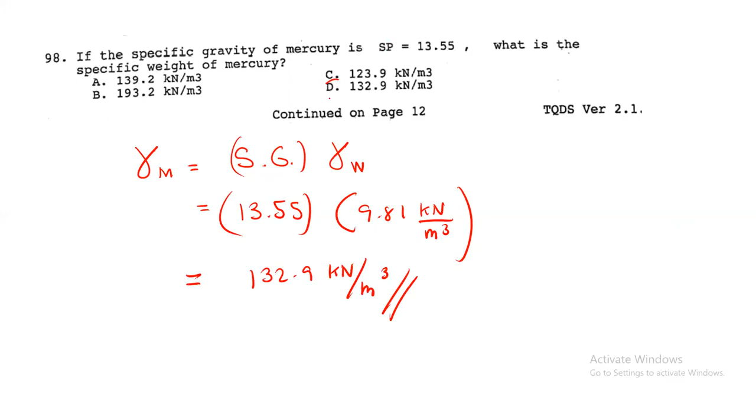Next, number 99: what kind of refrigerant is R600? R600 is butane.

Lastly, number 100, also from the blue book. Among the four, which of the following is not a method of starting a diesel engine? Of course, using another engine.